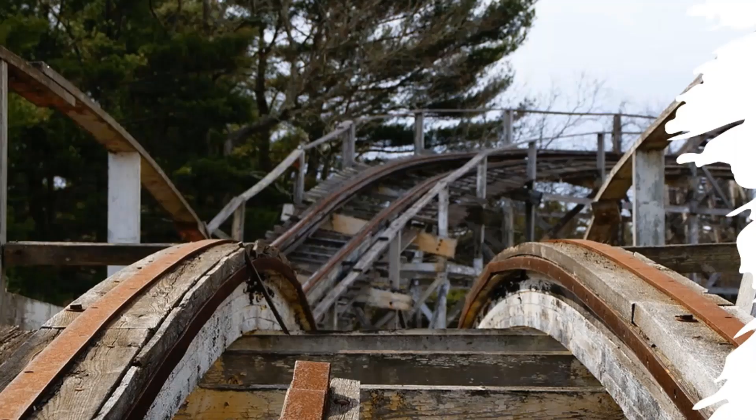I want to start with a quick story about my family. Last year at Christmas, we took a trip to a fun place here in Tennessee called Dollywood. It's a theme park with roller coasters and other fun events. One of the big things about this trip was that one of my sons had never been on a roller coaster, and I really enjoyed wooden roller coasters, so I was encouraging him to ride with me and experience the joy of it. I talked him up throughout most of the day.

It took some time for him to build the courage to ride the roller coaster. Here in Tennessee in the winter, night comes a little sooner than in the summer, so as he built up courage it took a little longer. Shortly after dinner, he finally decided he was ready to go try it, so it ended up being dark. We got in line for the roller coaster, and I was talking him up the entire time, encouraging him, saying it's going to be fine, you're strapped in, there's nothing to worry about.

We start going around the roller coaster and make that first curve, and I have the expectation of going up a little, catching the chain, going up the hill, encouraging him the entire way, and then going off on our adventure. But this particular roller coaster does not do that - you go around the corner and it actually accelerates you up the hill and does not slow down from there. Needless to say, he started screaming because we were not fully prepared for that, and I started screaming a little too because I was not prepared for it either.

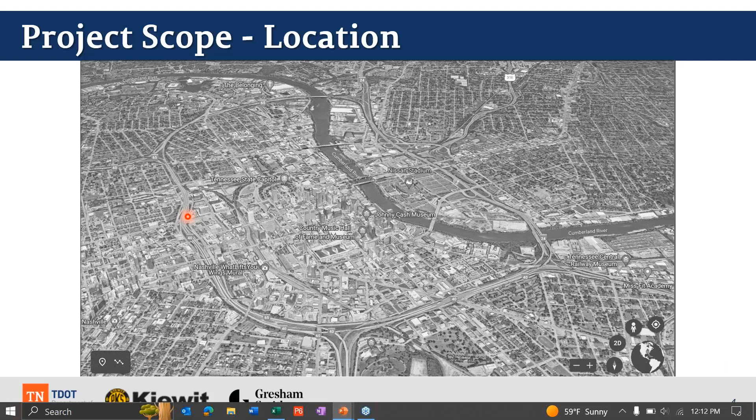So, project location - this project was in Nashville, Tennessee. You can see here under the star on the map, it was in downtown Nashville. Here's a map of the Nashville area. If you look, here is our inner loop around downtown Nashville, the interstate loop. The project, shown by this red line, is located really right in the heart of downtown. We have our central business district here just to the north, and our lower Broadway entertainment district, which is really a big tourism attractor.

Off to just the south of the project is a really developing area called the Gulch. And then we have our medical and business district, West End, out this direction.

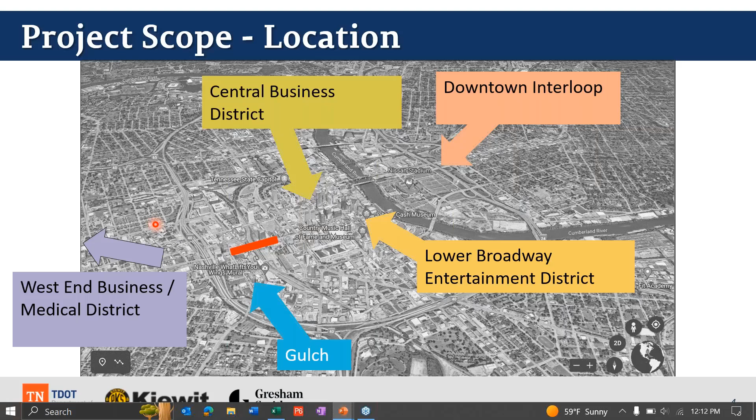Zooming in a little bit closer to the project site, you can see some of the more technical areas or details around the area. One thing I want to highlight is some of the constraints for the project. This building right here is the Union Station historic train station, right now it's a hotel. Just on the other side of it is a brand new Grand Hyatt Hotel, and our bridge is constrained in that it fits nicely right in between those two structures. It also has other constraints such as the railroad tracks running underneath. Just a few of the constraints we faced on this project.

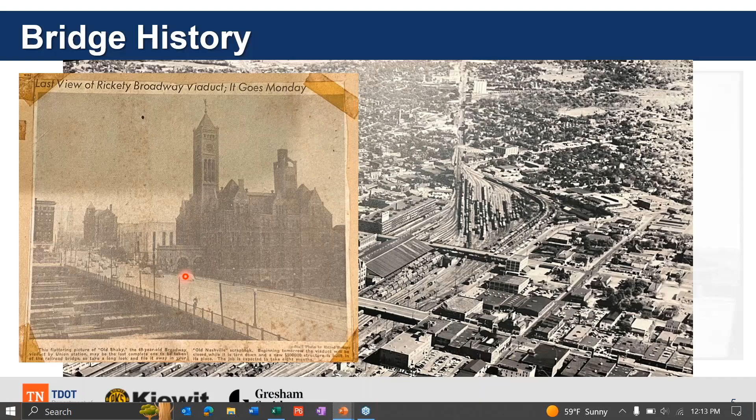A little bit about the history: this bridge was originally built in the 1800s, then replaced in the 1940s. The original 1800s bridge was affectionately referred to as Old Shaky. That's not the one we replaced in this project, but we actually replaced the 1947 bridge due to it being at the end of its lifespan. It had been through two rehabilitation projects already, and it was really time, especially with the surge in growth Nashville is seeing, to replace it before the project became even more constrained with additional development. This picture here to the right shows some of the features you'll see a little later in the presentation as far as aesthetics on the bridge, which really played a key influence.

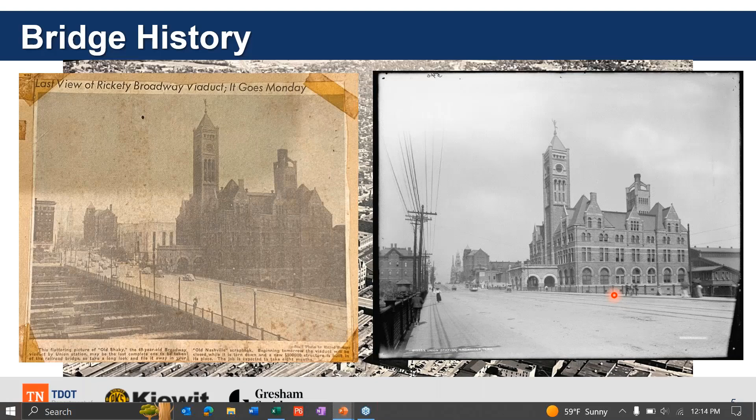So why did we need to do the project? Well, the project was near the end of its life cycle. The clearance over the railroad tracks was really substandard. It was enough to maintain it, but in order to improve safety, we increased that clearance over the railroad tracks. We know it's a gateway into downtown. It really feeds our lower Broadway district, and as I said, it's a really strong tourism attractor.

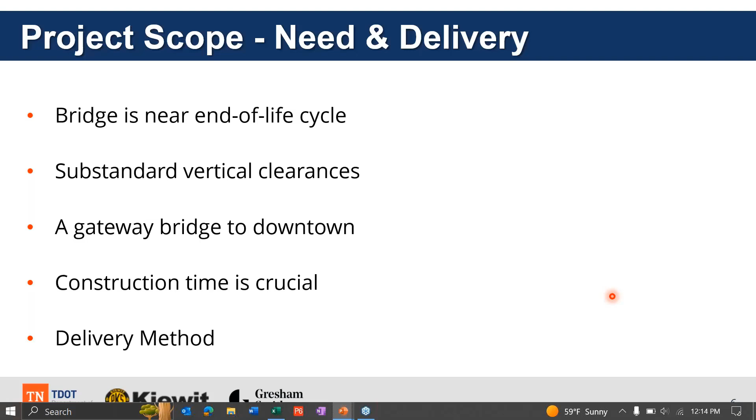We knew that construction time on this bridge was going to be crucial. Because of the type of structure it was and the location, phased construction really made it very difficult to avoid a long-term impact in the area. So with that, we chose the CMGC, or Construction Manager General Contractor delivery method, and we really wanted to see what opportunities were available to accelerate the bridge construction.

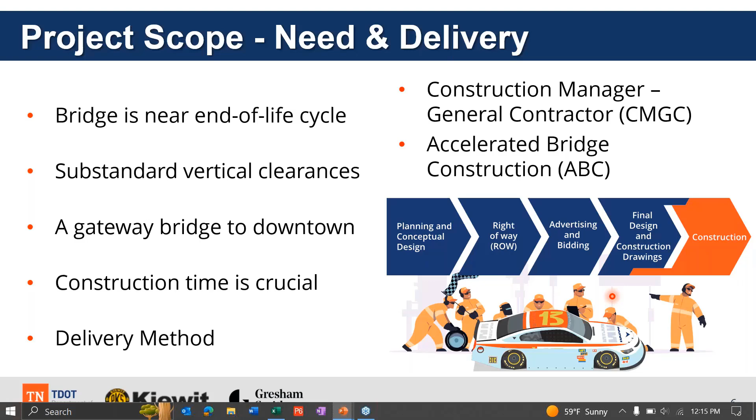What CMGC really means is we bring on a contractor early in the process to give us insight into how to build the project, how to approach it, what innovations we can use, are there new materials, different construction techniques or methods that can improve the process, and then adjust the design toward their capabilities to help with efficiency. Along with that, we get opportunities to price different design decisions so we can make the best decision for cost and design as we go through the process. We also get feedback and discussion on what different design options would do for schedule, what's feasible and what's not. And most importantly, we get to talk about risk with the contractor.

We get to identify risks, work through mitigation of those risks to reduce them, and then have the conversation about who should best own each risk, so it's shared with whoever is best able to maintain, mitigate, or hold on to that risk.

For this project, we knew time was critical, so we allowed for an 8-week full closure of the Broadway Bridge. With that, detour routes were pretty critical — if we're going to close this down, how are people going to get around? So we came up with feasible detours for the area to maintain access. One of our main goals was to maintain access to the local businesses in the area, in particular those significant hotels immediately adjacent to the project, which actually played more into the project that we'll discuss a little later.

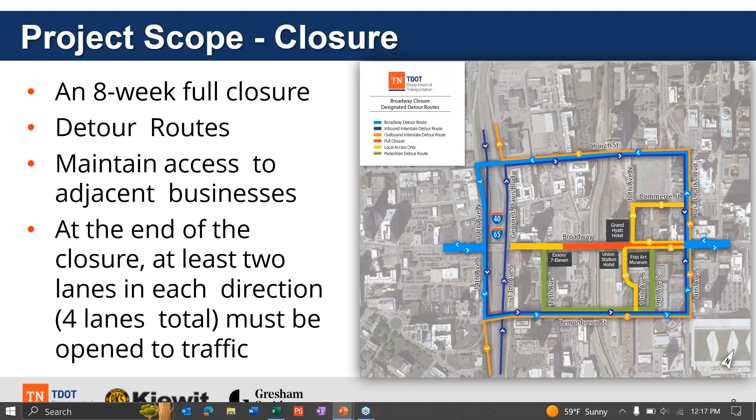When we talk about stakeholders, this project had several. Key among them are CSX and Southwest Values Partners. CSX obviously owns the railroad tracks underneath the bridge, and Southwest Values Partners was key as they own or maintain the two hotels on the eastern end of the bridge.

There are others. Highwoods is another property owner who was key with this project. NDOT, or Nashville DOT, was absolutely critical in coordinating the design and construction activities right away. There were also significant utilities, referenced here by AT&T. Maintaining communication with all these stakeholders was important, not only early coordination but all the way through construction, constantly talking with utility owners, getting their observations and thoughts, and incorporating what we could to minimize impacts and facilitate the project.

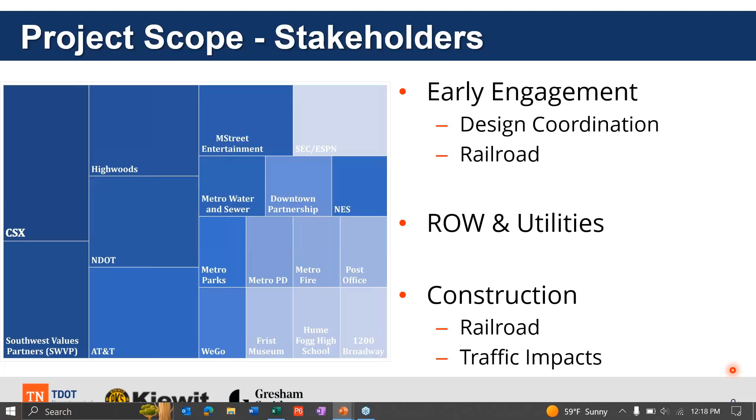For project schedule, during pre-construction we brought the CM, the construction manager, on at the end of 2021, early 2022. Right-of-way plan design occurred from January 2022 through April 2022, with construction design following through June 2022. During that time, right around April, the right-of-way and utility coordination process kicked off, running into March of 2023.

We were able to accommodate some early work packages with this project, which allowed us to facilitate early procurement of materials and preparation activities for the closure. We ended up with a GMP contract, with negotiations ending around the October-November timeframe of 2022.

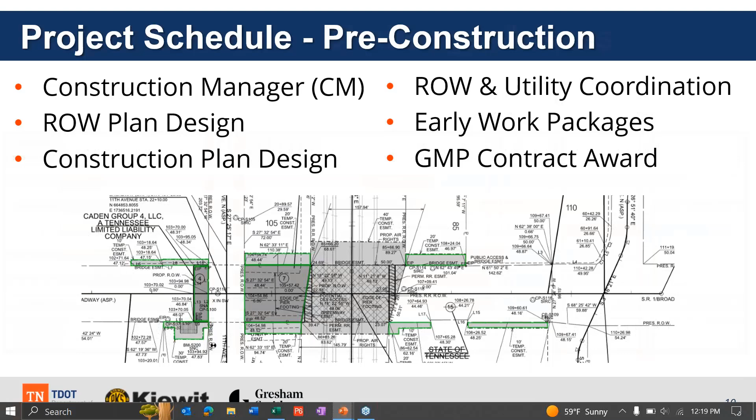We did have some challenges with our schedule. We initially started with this scenario, the one we dubbed 'the miracle' - our ideal plan for the project. We wanted to be done with design and all pre-construction activities around the August timeframe, allowing the winter months to prepare for closure, and then have the closure window outside of main tourism events like the CMA Festival, Independence Day, and Labor Day, when we see significant increases in visitors to downtown Nashville.

We got into the project and found out we were not going to be able to meet that schedule. So we started looking at options to still hit our goals of not significantly impacting downtown while delivering the project as timely as possible. Option one was the 'pause button,' a more traditional delivery path, but we decided that was not in the interest of the project or the Nashville area, so we looked at other options.

The option we went with was what we affectionately dubbed 'risky business.' It's risky in that we kept moving forward with what we could while continuing the utility and right-of-way coordination. If you look at the risky business schedule, that actually reflects the true schedule of what occurred on the project. We were planning this early on, and it fit within these timelines, allowing us to do some early work while finishing the right-of-way and utility negotiation process, which ended May 8th of 2023.

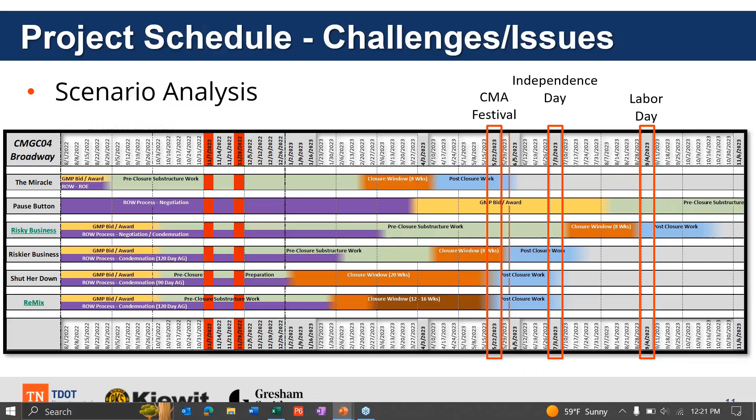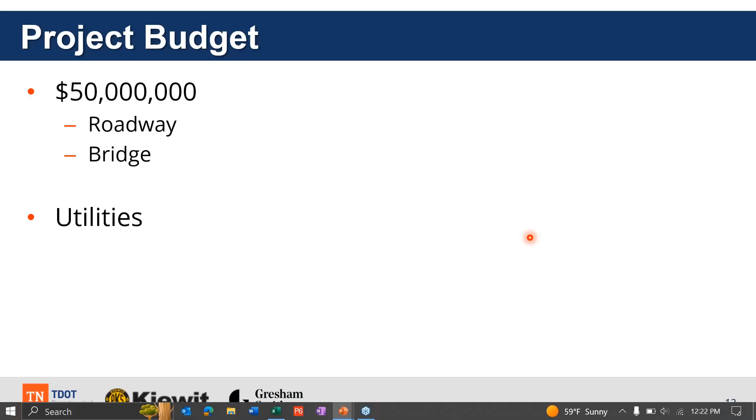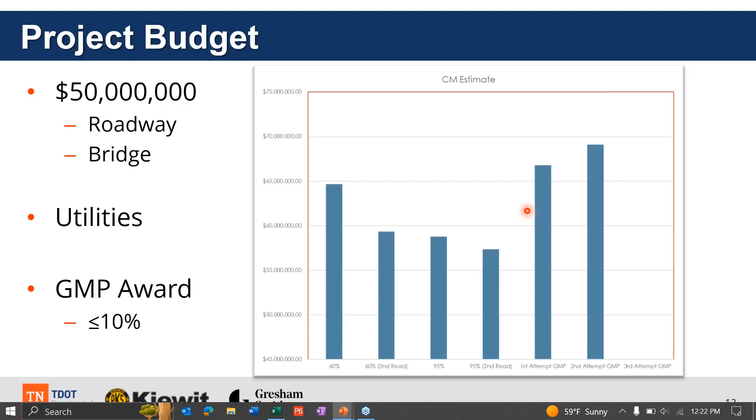Our process is that the contractor gets three attempts once we go into final guaranteed maximum price, or GMP, negotiations, and the contractor has to be within 10% of the department's internal estimate, or we hire an independent cost estimator, or ICE consultant, to work alongside us to prepare an estimate. We ended up at just under $72 million for the bridge - about 23%, a quarter of it, is the roadway approaches on either side, and about 47%, just under half, was the bridge itself.

And then there are other utility and indirect costs and some contingency included as well. When we look at cost per square foot of the bridge, if you take the whole cost per square foot of the bridge, it's about $1,290 per square foot, which is really, really high. For the bridge only, it was about a $618 cost per square foot, which is still above what we typically see in the $250 to $350 per square foot range.

So it was a little bit more expensive, but as we get into some of the constraints and the details throughout this presentation, you'll see what contributed to some of those costs.

So critical elements of construction: being in an urban setting, there was lots of lack of access and other downtown construction. I mentioned that Nashville is really a booming area, so there's a lot of tall buildings being constructed in the vicinity of the project, so we had to coordinate with those.

Adjacent stakeholders were really critical, coordinating with CSX and the railroad tracks. Don will go through some of the details on this in a bit, but there were some active AT&T utilities that had to be maintained and remain in place as the old bridge was demolished around them.

And the new bridge was put in place without moving them. Because of this and the accelerated work schedule, we looked at early work packages to allow some of those long lead time items to be not impactful to the schedule - bridge girder procurement, precast panel procurement. There was some early utility work to get those out of the way as timely as possible, and some of the critical laydown yards were prepared in advance of the work.

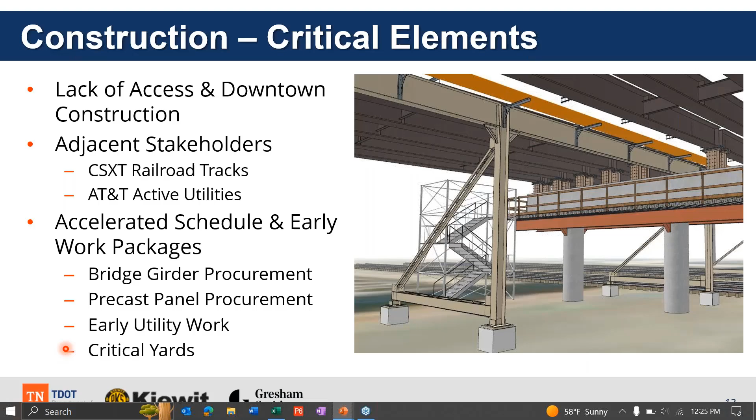The closure window was from July 7th, just after the Independence Day holiday, to September 1st, just before Labor Day weekend - there's an asterisk there we'll talk about in a second. You can see in the images below the phasing: demo the old bridge, place the new girders, place the precast panels, and then clean everything up, all within that 8-week time period.

However, a few months before we got into the closure period, the Southeastern Conference football media days were announced to be in Nashville for the first time ever. And they said they were also going to hold it right in the Grand Hyatt Hotel, the one you've seen in some of these previous pictures, and by the way, this would occur in about the second week of our full closure. So we had a big challenge of how to facilitate this major event, especially for the city of Nashville.

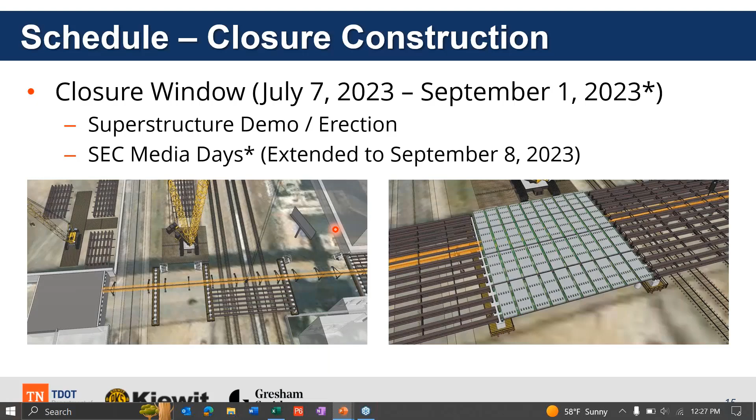Let's look at a few construction pictures here - we'll cover more a little bit later, but just some details. Due to some of the constraints, there were time-consuming operations, such as the AT&T conduits that had to remain in place, requiring a procedure to pull those out one piece at a time.

In particular over the railroad right of way, big sections of the bridge were pulled out in chunks at a time. And where we were able to, in order to facilitate speed, we demoed the bridge by traditional means.

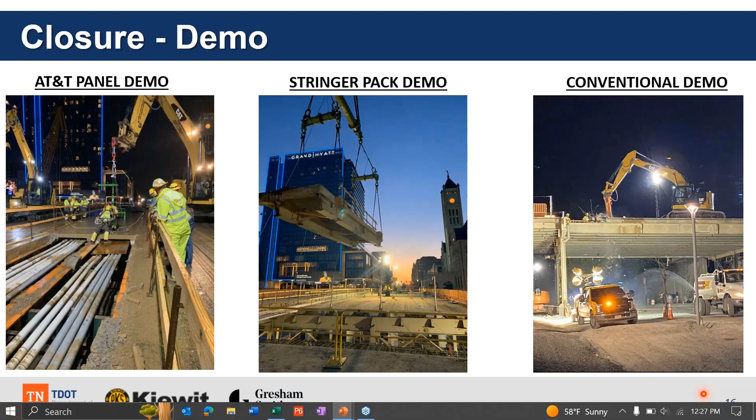The superstructure steel was about 70 girders total, in a simple span configuration, and there were some significant efforts involved. You can see here the AT&T conduits that were suspended in place and then transferred over to the new structure as those girders were put in place - a very, very innovative feature on this project.

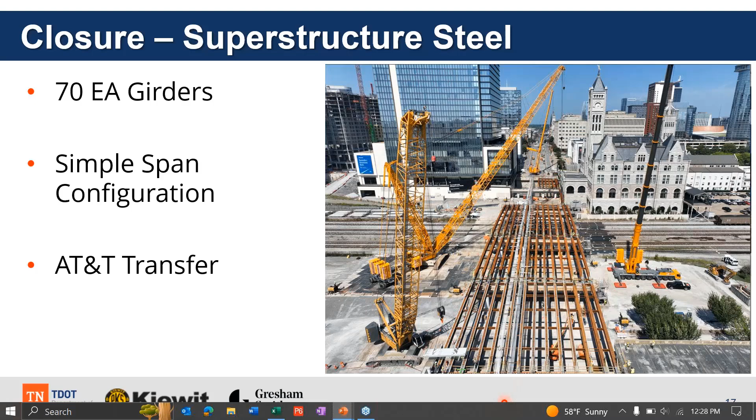Precast panels, we had about 276 of those. They were about 8 feet by 25 feet and about 25,000 pounds per panel. And those were all set really timely and really without any incident.

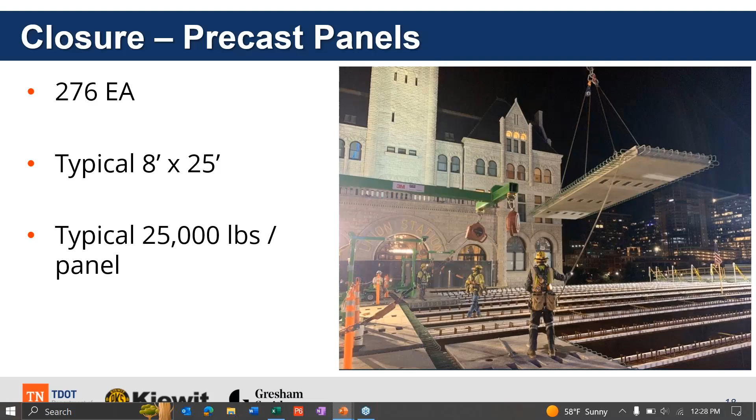Following that, once all those panels were in place, the contractor began with closure pours, and then in order to get a good smooth riding surface, they had to grind through some of those. We have an epoxy overlay just to seal and protect the deck.

With that extended time of closure and the pace at which the contractor worked, they were able to go ahead and add and complete both parapets on both sides and both sidewalks on both sides of the bridge, so that we would no longer impact traffic significantly once the closure was open. Roadway tie-ins on both sides were also completed in that time.

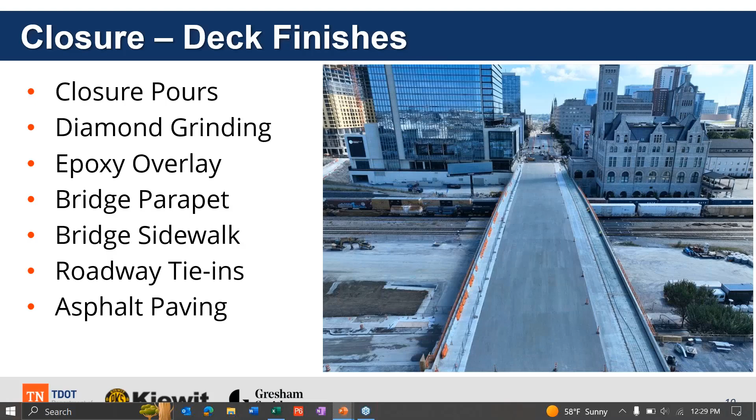And we were able to open right on time and without any delays, and with a little bit more work than was originally planned to be accomplished during the closure. And with that, I will turn the presentation over to Don. All right, thank you, Clayton.

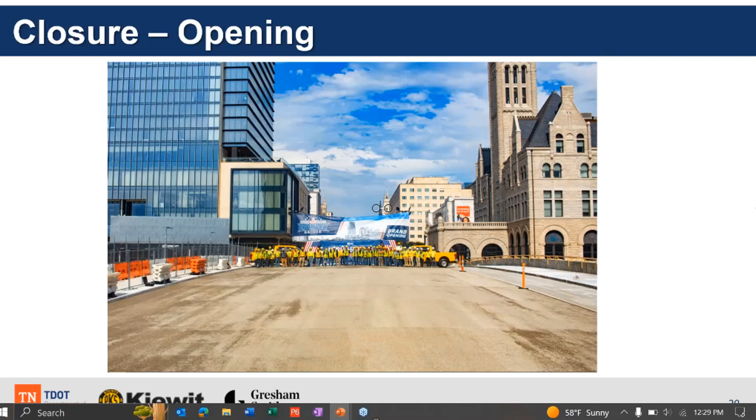All right, just go over a little bit about the bridge design and the constructability of it. So originally, before the contractor came on board, during our planning stages, we came up with a 30% layout of the bridge, just to give something to the contractors to throw into their RFPs.

So originally, the existing bridge here is an 18-span steel structure. And early on, we ended up going with, during the preliminary stage, a 10-span pre-stressed concrete bridge.

Some of our factors, again like Clayton mentioned earlier, the construction schedule was very key to the success of this project. And then also with that entails some of the construction approach, the railroad clearances, the adjacent buildings - the Grand Hyatt and the Union Station on both sides of the bridge - and then of course the existing substructures and their foundations, and also the utilities. So all this put together was sort of the driving factors into trying to figure out a different configuration that would help speed up the process.

So once the contractor came on board, which was Kiewit, we collaborated with each other and came up with a new configuration that would work well with them and with the 8-week closure period that was going to happen.

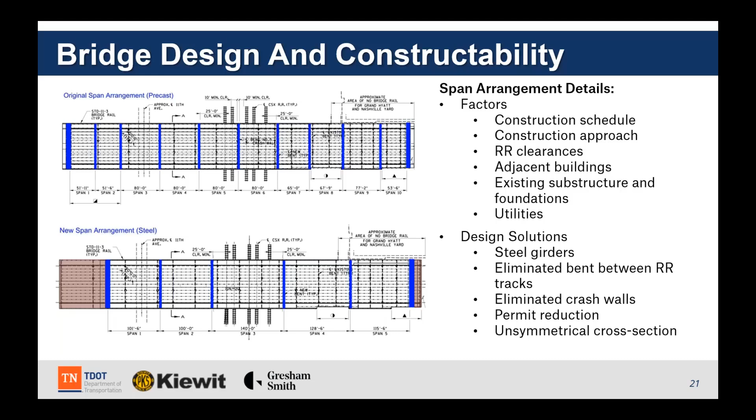So the existing bridge length was about 702 feet. We ended up shortening it to 564 feet. Main span is a 140-foot span, steel girder, about 100 feet wide with sidewalks on it. And then we ended up utilizing full depth deck panels, which had a 3/8-inch thin overlay. Also, on our deck panels, we allowed for a 1/2-inch tolerance for grinding.

So let's talk about something unique that we ended up doing in filling these two existing spans here. So originally, it's just a little bit of history on this area. The Tennessean, which used to be a newspaper company that ran in the state of Tennessee here.

They actually utilized these two spans here, and they built walls underneath this. So they essentially just utilized these two spans, and what they would do under here, they would hold their newspapers and things like that.

And so TDOT agreed that we didn't really need to use any of this space here. So we ended up converting these two areas with some lightweight cellular fill.

And what that does with the lightweight cellular fill, it allowed the contractor to place this lightweight cellular fill while the existing bridge was still open.

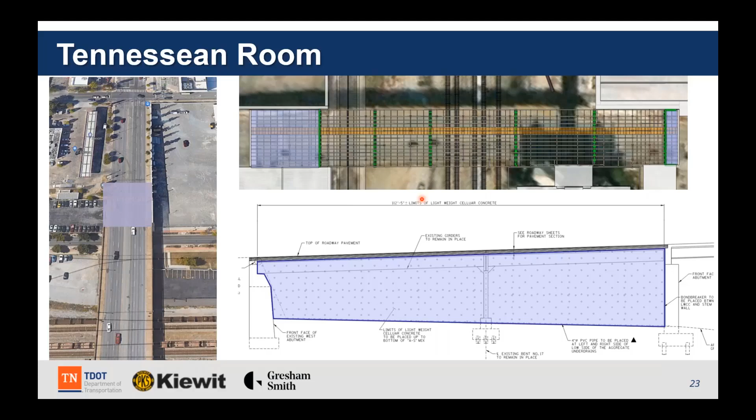Just a little schematic here on what we ended up doing. So the lightweight cellular fill is poured in 3-foot lifts, and the good thing about this lightweight cellular fill is that it's a self-supporting fill, so they didn't have to have any kind of walls or anything like that to hold this back. And another neat thing about this is the existing steel girders there - we actually left those in place.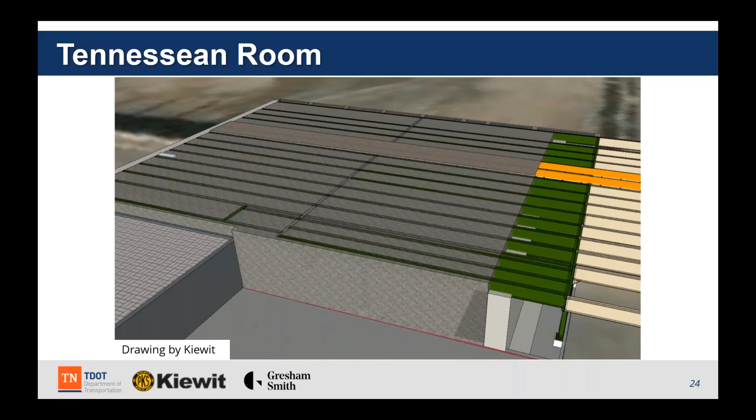So the contractor didn't have to excavate those out and take any of that stuff out. We actually brought that up to grade and then just poured asphalt on top of that. There's just a picture of the construction there, being, again like I was mentioning earlier, placed in 3-foot lifts.

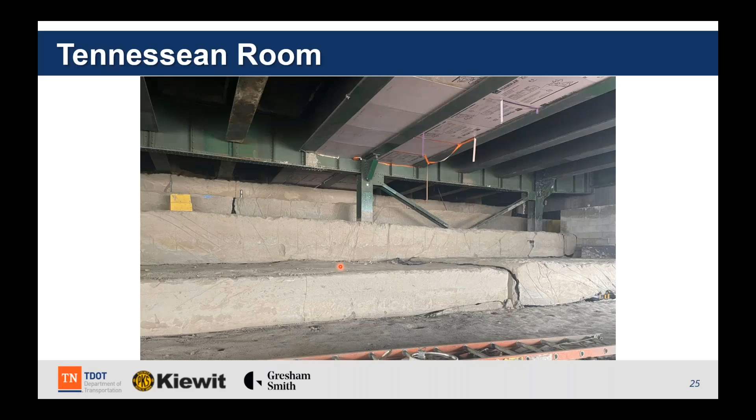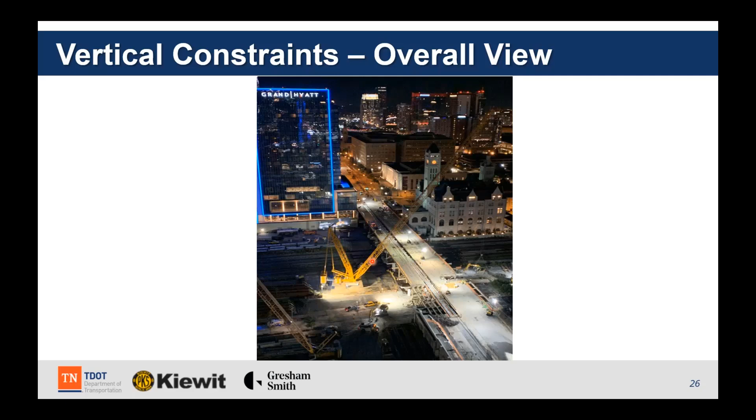Let's go talk about some of the vertical constraints on the existing bridge here. As Clayton mentioned earlier, we had a lot of constraints we had to deal with - the Grand Hyatt here, the Union Station Hotel here, and our railroads, which were substandard to begin with. So we couldn't raise the grade as much as typically you would to meet the 23-foot clearance.

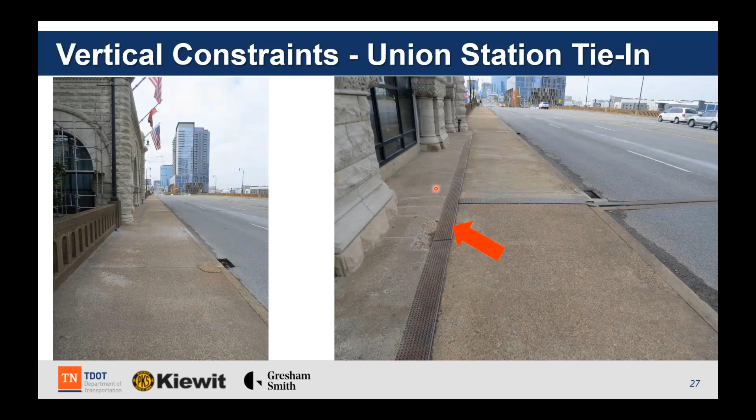There's different tie-ins here that we had to deal with. Here's the Union Station tie-in - we had to tie in with their front entrance right here. And on the other side at the Grand Hyatt, same situation - we had to tie back in to their front entrance and sidewalk. That just limited us on our vertical clearances and how much we could raise our profile.

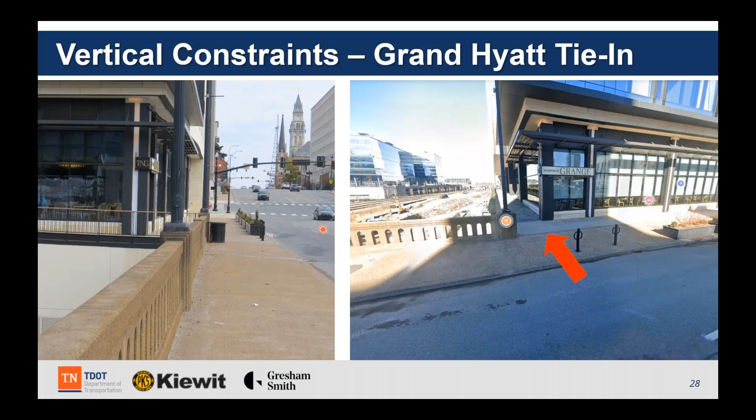So just to give you an illustration of our profile here - the existing profile was almost flat, with a little bit of a curve. But here's our existing railroad clearances, which were substandard to begin with. During the early process, TDOT engaged with CSX, and they came up with some values which CSX agreed on, and that's what we ended up raising our profile to. So now you can see we've got a pretty significant hump in our bridge. Here's the construction, just to give an illustration of how defined that vertical curve is.

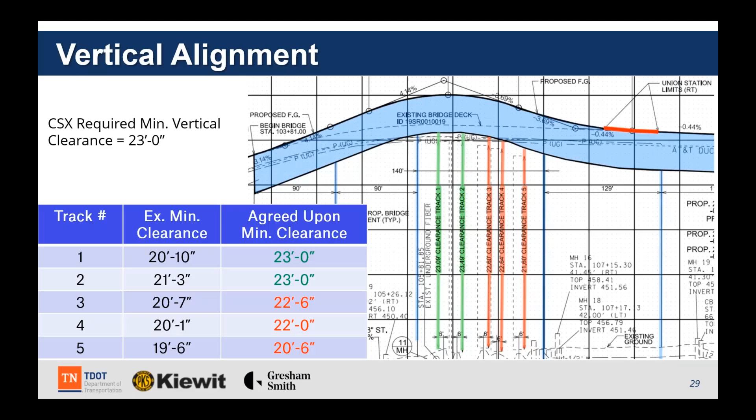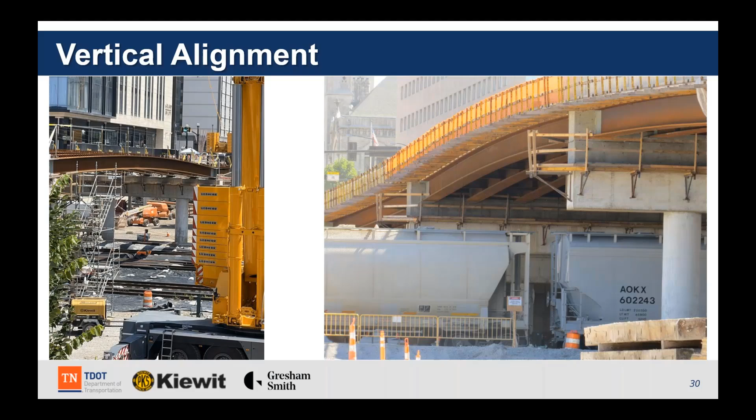Let's go discuss a little bit about our precast deck panels, some details on that. We ended up using 10-inch full deck precast deck panels, and allowed for a half-inch tolerance for grinding.

A couple key impactful decisions on these - the layout of how we laid these panels out. Traditionally, what we'll do in TDOT in Tennessee is use longitudinal panels, which makes it easier to consolidate your concrete over your beams. But as you've seen on the previous picture with our vertical curve, if we used longitudinal panels, the amount of grinding required would have been significant and time consuming. So we ended up going with transverse panels with shear pockets to make the deck composite.

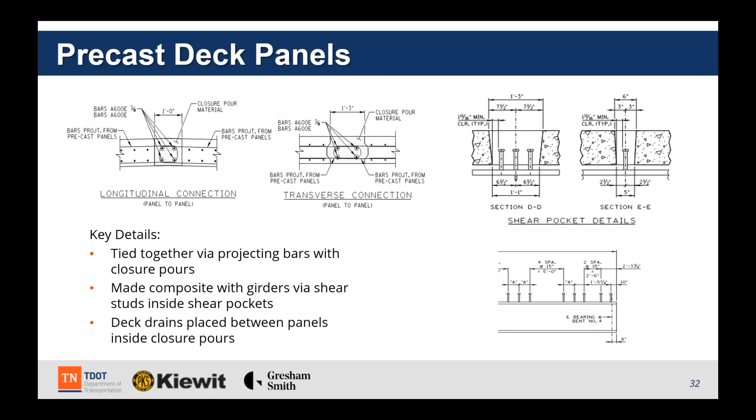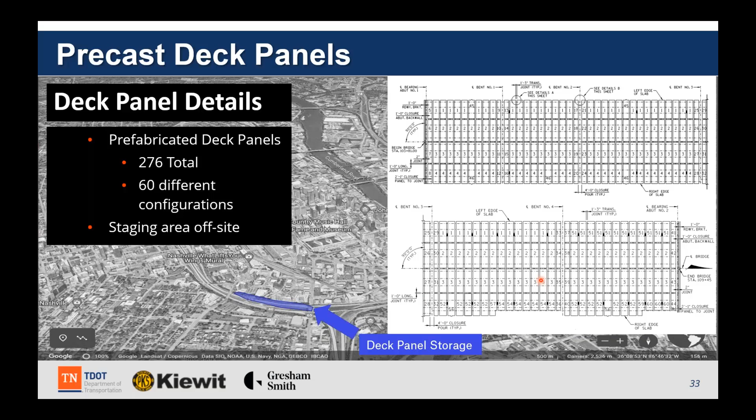Let's discuss the deck drain system. We had to have a closed drainage system within our bridge, so we typically used the TDOT standard deck grates. What was pretty interesting here - originally we were going to have these deck drains cast with our deck panels. But we looked at it and made our deck drains in the closure pours instead, which saved time for the fabricator of the deck panels, and made it a little easier for the contractor to construct these and get the deck grates at the right grade.

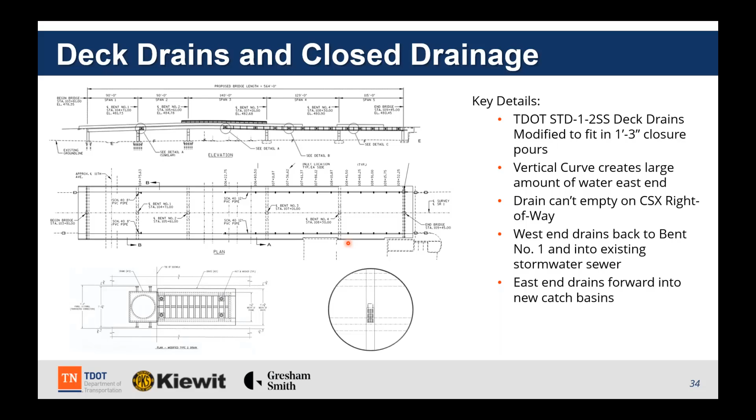I'll discuss our design and how we ended up going with a simple span configuration on our steel girder placement. Traditionally, everybody knows that you want your steel girders to be continuous, with splices over the bents on either side, and field bolts to connect those girders.

Looking at that, with our schedule being an 8-week closure, and with a 600-foot long bridge and so many girders, the contractor felt it was going to be really difficult to get the field bolting done in time for all our splices. We've got 4 bents, so to get all these splices fit up and tied together was going to take a significant amount of time.

So our solution was to utilize simple span girders. Because of the vertical constraints with the railroad, we didn't have very much depth to work with. As you can see in this picture, we had very shallow, inefficient girders - our total depth was probably 36 inches. So our span to depth ratio was very high, and our biggest challenge was how to limit our live load deflections.

So one of our solutions was to make it a simple span, and make it continuous for live load through the use of concrete diaphragms, which I'll go through in a second. Also, for our flanges, we utilized high performance steel, grade 70, because we wanted to limit our flange widths due to the adjacent hotels. Without grade 70, we would have had to use really big, large flange widths.

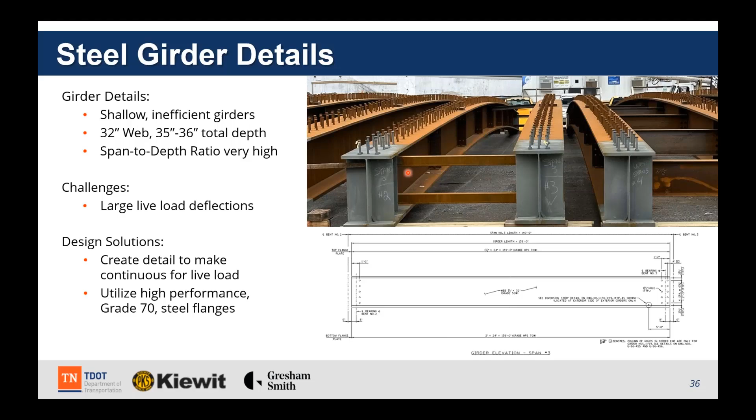Here's a little illustration on how we make it simple for dead load and continuous for live load. Girders are simply supported spans, and when the deck is cast - represented by the dark blue line - the girders are tied together over supports using diaphragms, after the placement of the panels. Continuity is established with the diaphragms after the panel closure pours and the concrete diaphragm is cured. Then any additional loads added after continuity is established will produce continuous load effects on the spans.

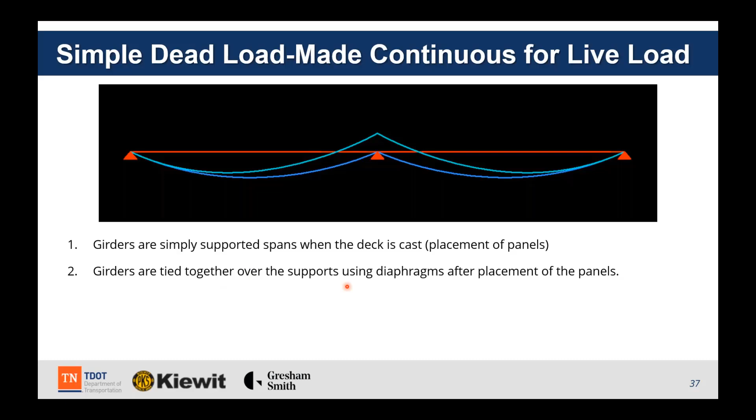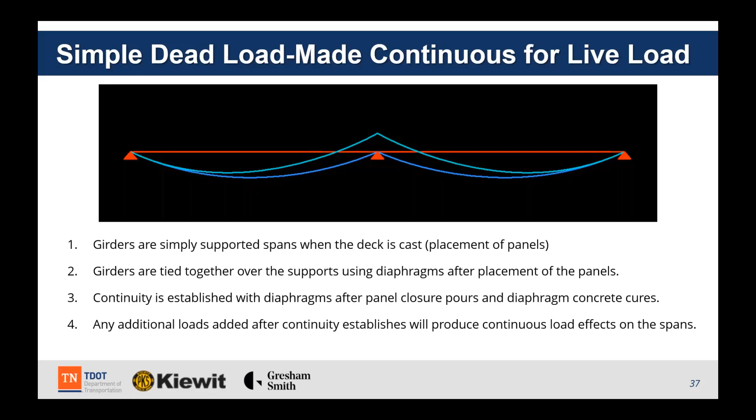To account for that, we utilized CSI Bridge, a finite element modeling program, to get our torsional effects and moments, and design our concrete diaphragm to that.

Let me talk a little about why we chose continuity with the concrete diaphragm. Traditionally, what TDOT does is have splice plates connecting the two girders to create that continuity. Again, with schedule being the biggest driver, just trying to bolt up all these splice plates with these girders was going to take a significant amount of time.

So through doing some research, which FIU had done, we ended up using a concrete diaphragm - we threaded bars through the ends of our girders and tied them with stirrups. Here's a detail right here. The moment is transferred through concrete compression, and we utilized drop-in reinforcement in our slab to provide for that tension in the slab.

Let me talk a little about the substructures and footings. As Clayton mentioned earlier, we did some early work here - we were essentially building our substructures while the existing bridge was still in place. Traditional H piles just didn't lend themselves to the situation because of our confined space and limited overhead.

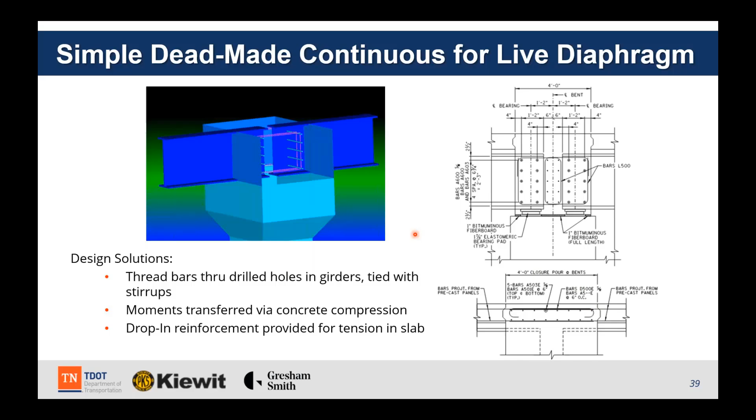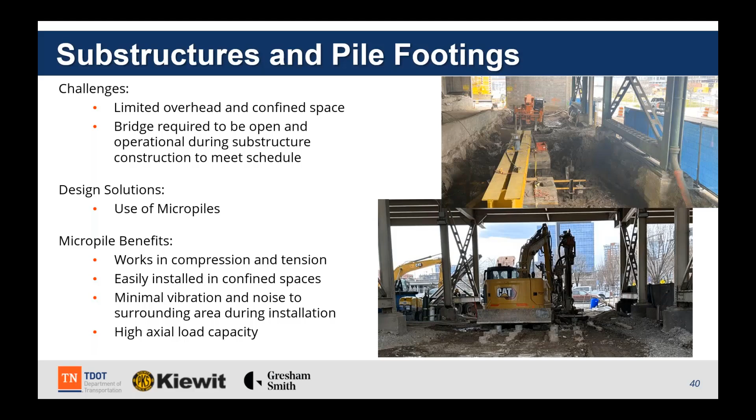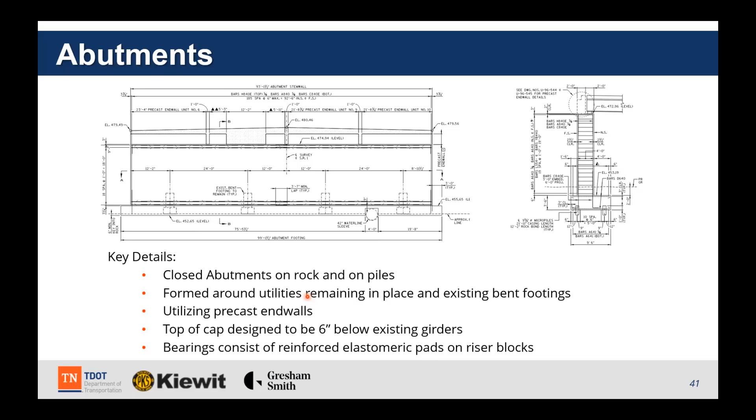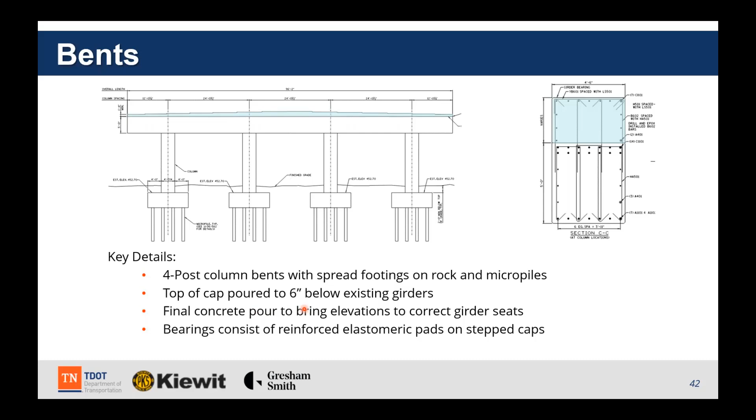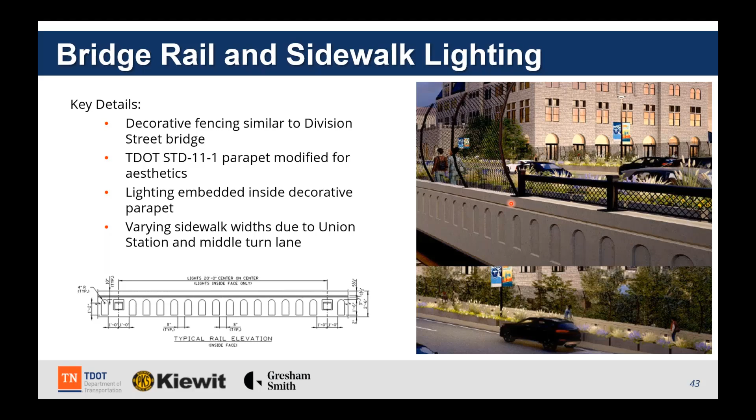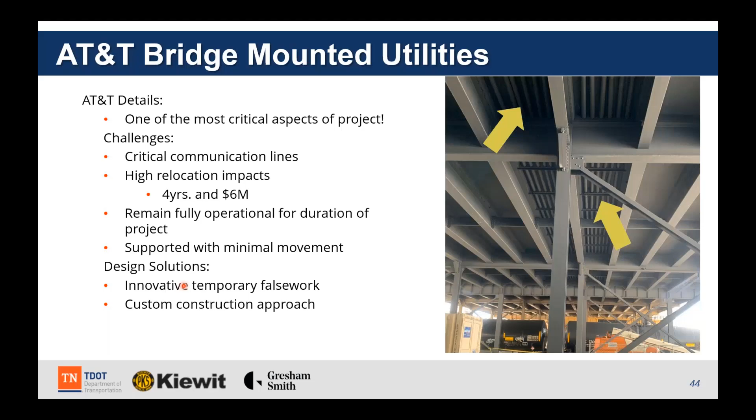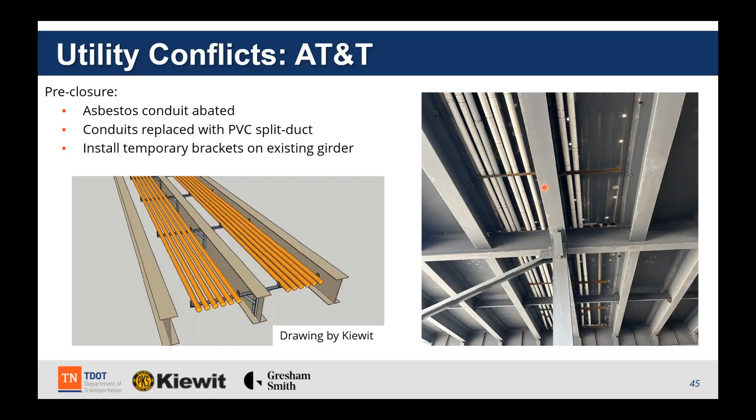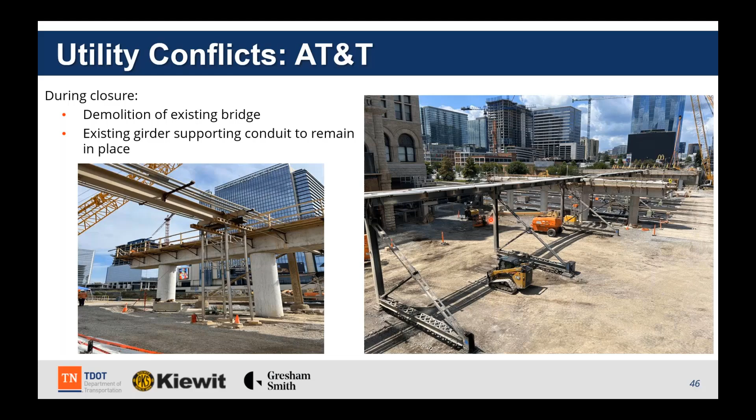I'll go through some construction photos here. Here they're demolishing the bridge, and as you can see, here are the AT&T lines. Here they've got everything completed and demolished. Here they're setting girders.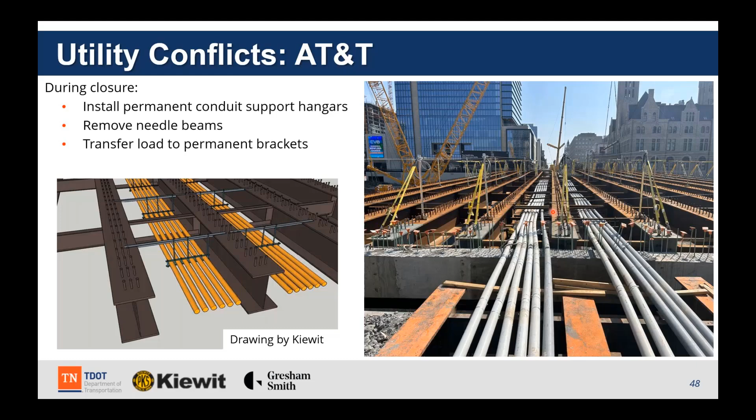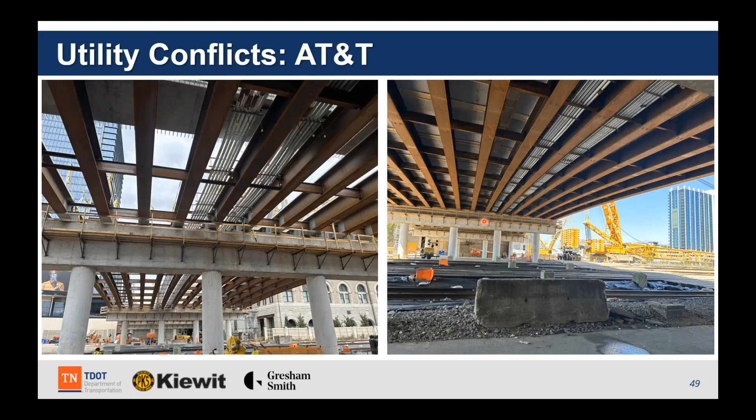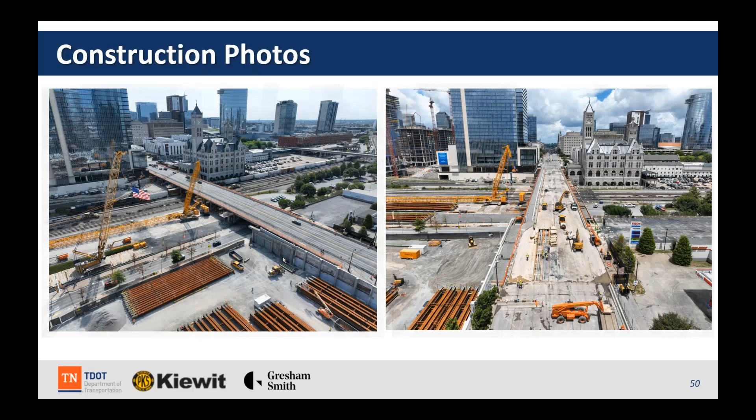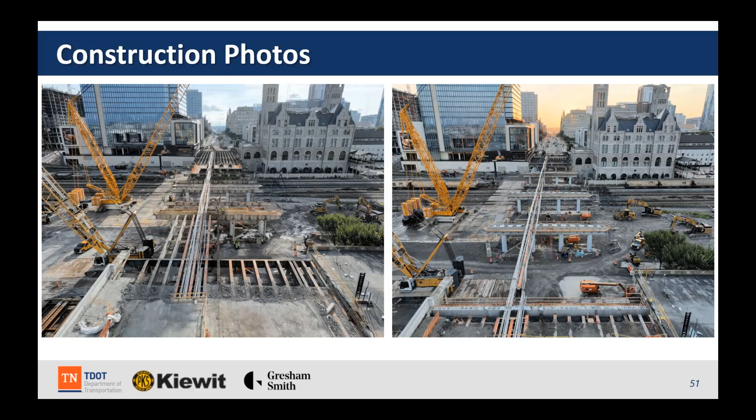Here they're demolishing the bridge, placing the new girders, and then placing the deck panels. It's really amazing with all these deck panels and the geometry of our bridge. The contractor really had no issues setting these deck panels, and they fit perfectly like we designed them to, which is pretty amazing given how long this bridge is and how many deck panels we had.

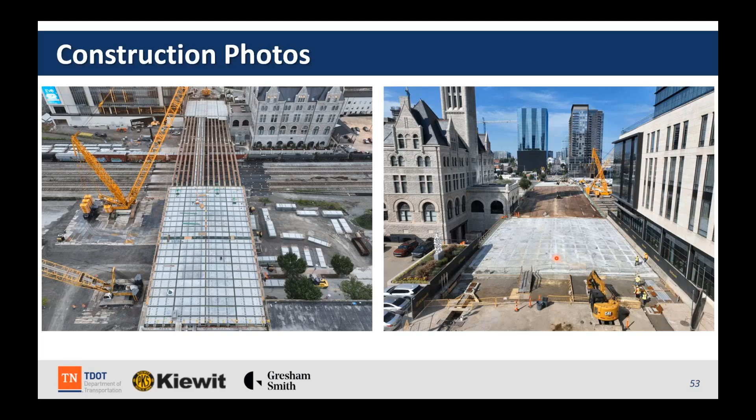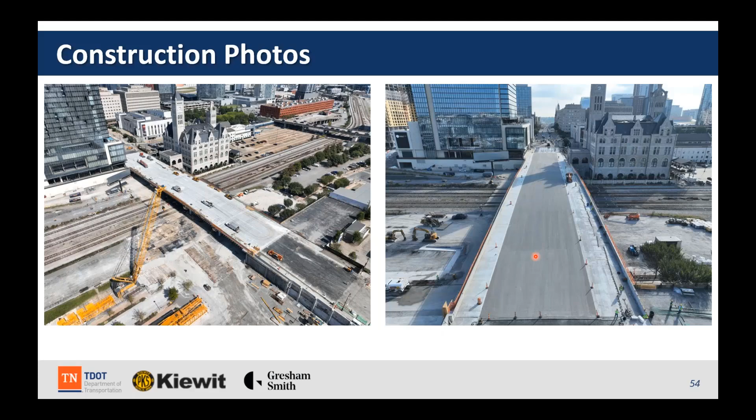Here they're grinding the deck and placing the sidewalks on the bridge, then laying the epoxy overlay, and that concludes it.

The first one, from pre-webinar, was: was lightweight concrete considered for the bridge deck? It wasn't. We entertained it if we were going to have issues with our girders, then that would have been something we'd definitely use, but originally it wasn't considered.

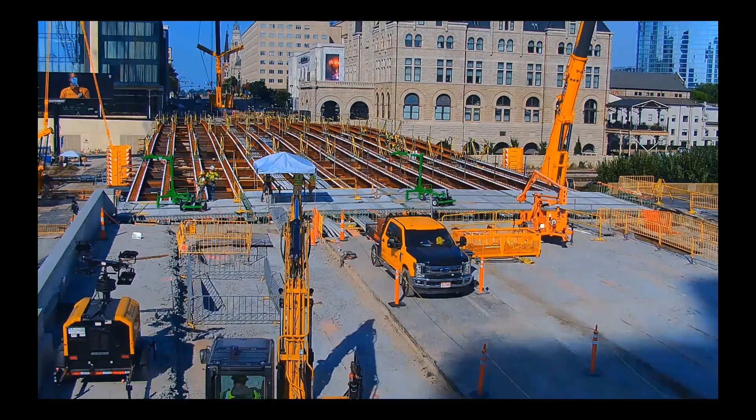Then, is the epoxy deck overlay the traffic wearing surface? Correct, it is.

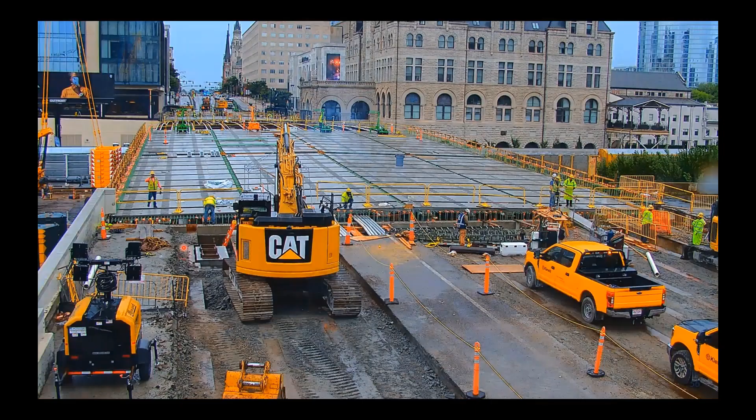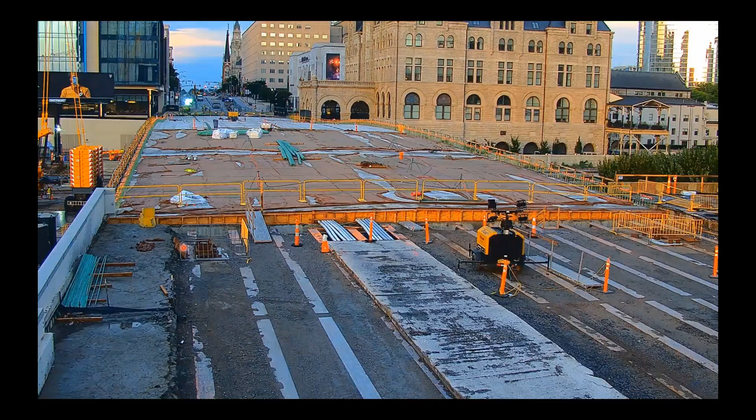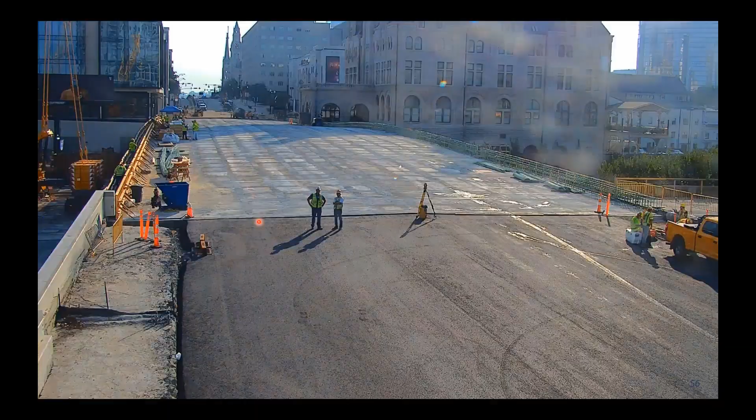We had a few design questions here, and I'll try to address them. One asked: did you consider steel boxes topped with a concrete deck to form a module, using simple spans for dead load and continuous for live load? That's something considered sometimes in ABC. We did not consider that. That's a good point, that may have been something we could have looked at, but we didn't.

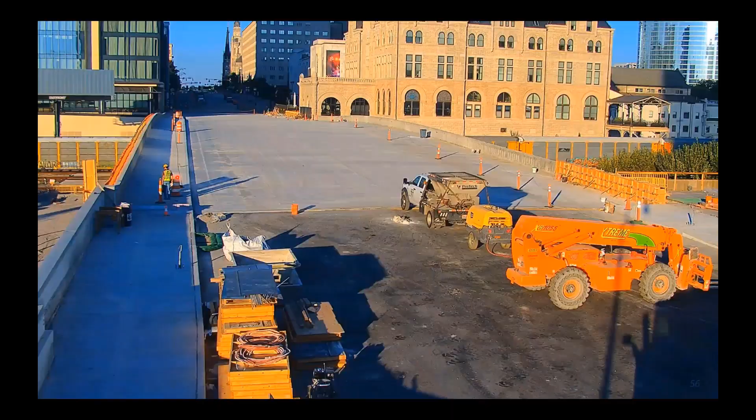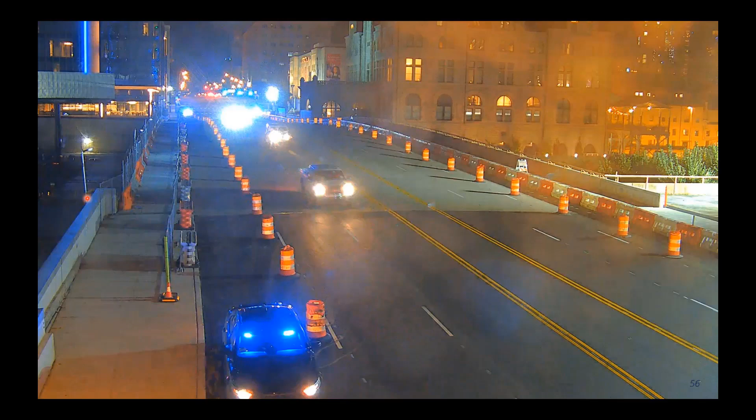Do you have any idea of the relative cost of using 70 KSI flange high performance steel versus maybe 50 KSI? I don't remember right offhand what that additional cost was, or exactly how much more it was versus grade 50.

There's a question about when making girders continuous for live load — some people have said the diaphragms could crush, and some put plates at the ends of the I-girders. Did you consider doing that? We were going to, but we just took that into account in our concrete diaphragm design. Since we had such a big diaphragm, a 4-foot diaphragm, it wasn't going to crush.

I've got a few more construction questions. What material did you use for the closure joints, normal strength concrete or UHPC? I meant to mention that in the presentation and apologize, I just glossed over it. We did look into using UHPC, but because of the pour rate and the number of closure pours we had, the contractor felt they couldn't get it all poured within the 8-week closure period. So we ended up using TDOT's standard traditional higher strength concrete.

There was a question on vertical clearance: what was the impact on the final vertical clearance from choosing simply supported then continuous for live load, as opposed to straight continuous girders all the way through? The issue was that the contractor couldn't set their girders fast enough if we went with traditional continuous girders. Yeah, you showed that in one of your diagrams, that was pretty good.